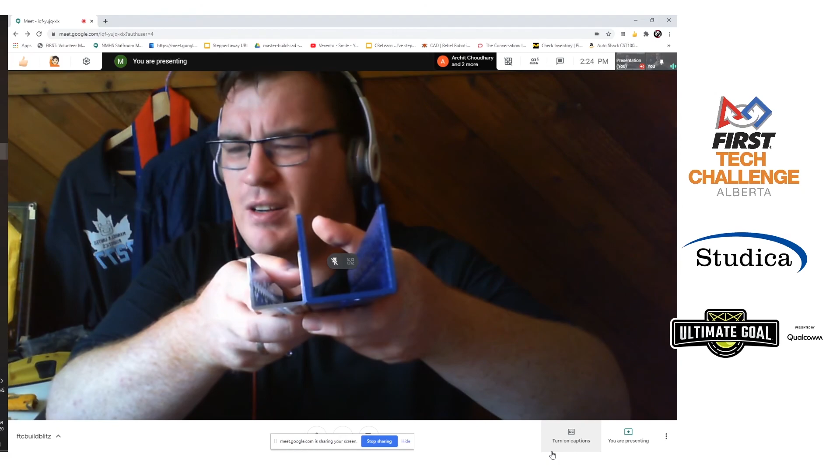It has some oval holes instead of round ones on the 45s here, but it's not quite the same size. You've got the difference between roughly 1 inch C channel and 1.5, maybe 1 and 5/8 inch C channel. The Tetrix tends to use imperial measurement bolts, usually number 632s, and the Studica one uses 3mm metric. So if you have both kits, keep your bolts separate, because 3mm bolts don't like 632s very well, and vice versa.

I actually recommend that a team pick one of them and stick with it, because they're very similar but cause all sorts of problems in the threading. That being said, I've already gone ahead and uploaded the Tetrix, but I'm going to upload some of the Studica parts here, because they're also what we're going to be using for this build.

For the basic bot, predominantly we're going to use Tetrix parts, because many of our rookie teams have those basic parts. Whereas some of our other teams might be looking for these Studica kits and integrating some of those. In the Tetrix folder, you can see I've already got all of the parts listed and uploaded here, and that's a good thing. I'll show you how to do that now.

If we go back to Build Blitz, go to our part files, and go to Studica, this folder is empty, but we do have the ability to upload parts. Obviously I've got that library of files - you can see I've got the Tetrix ones open, but I'm going to go back to the Studica parts and very quickly grab a few parts I might need to get started. I'm going to set up the rest of this folder.

As you can see, I have all of their parts, and these are the ones we'll be using from the kit. So I'm just going to grab some C channel right now, get started, and upload this stuff. Obviously I will upload the rest of this when we go there.

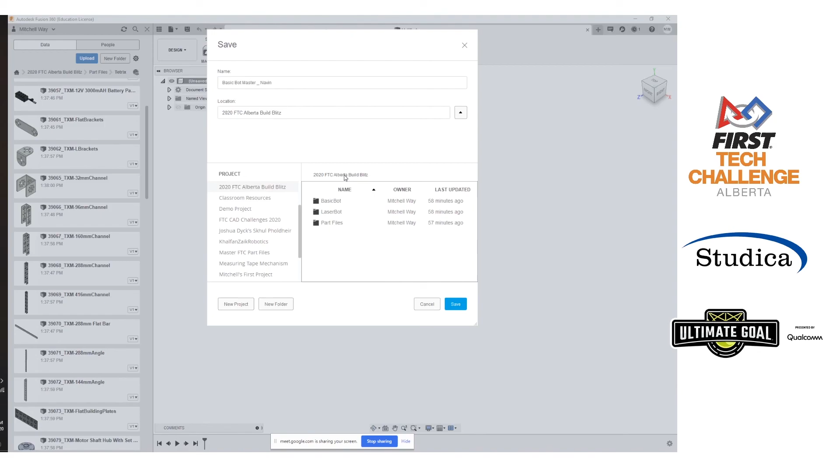That's not what I want. So I'm going to go back here, and I'm going to go to my 2020 FTC Alberta Build Blitz, and I'm just going to go back a couple of files and go into my basic bot folder that I'd created before. That way this robot gets saved into the right spot. So I'm going to go ahead and save this.

You'll notice that the name now changes to Basic Bot Master, and it's version 1 right now. We'll talk about what that means in a minute. But if I go to the basic bot, you can see that it's right here. I have it open, and I'm just going to show you how this works within Fusion 360 to actually bring part files in.

Now I can go, and if the first part I'm going to work with is this 416mm channel, I can click and drag it over here. And it's going to show itself up in the master file. Now, this file is what we would call a reference file. It's actually referencing the channel here in the part file. And that's the key thing here.

That means if I change the reference file in the part file, it's going to change whatever happens in the main robot. Probably won't be an issue with what we're doing because we're building the basic bot and we're just going to put a couple of wheels on this for now. So I'm just going to press OK.

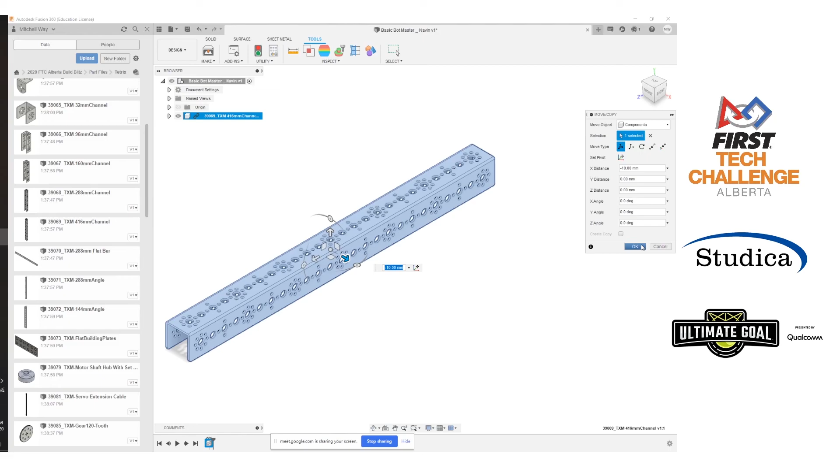I can place it anywhere in my drawing. If it's the first thing that I'm actually putting in the drawing, it's not really important where it sits, though some people will tell you that they really like putting it at the origin at 0,0,0. So there we go. We've got our first beam there.

Life is good. But we realize we want to have a wheel assembly here. So you'll notice that once I have this part here and I go ahead and save, I can click the save icon here. If I go back to my basic bot, you'll notice that this updated to show the newest save here. And it is version 2. It's the second time I've saved it. It'll keep counting versions, and Fusion will let you go back to previous revisions if you want to.

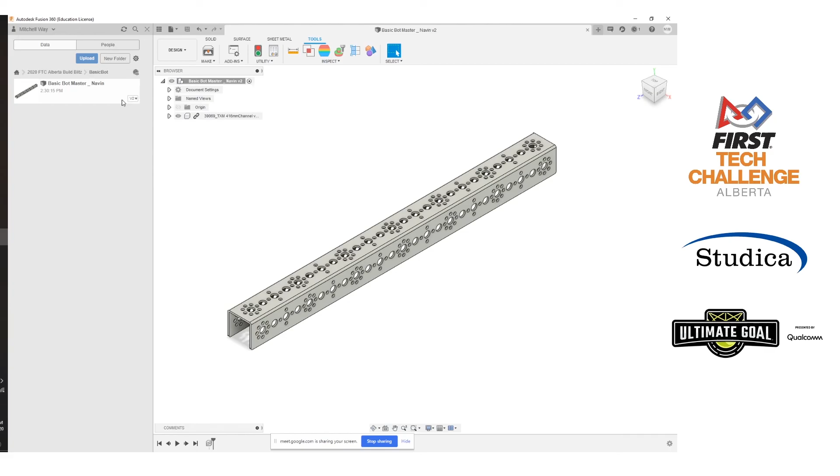I'm actually going to create a new file here. New design. And I'm going to save it, in the basic bot folder, as wheel, hub, and axle. And I'm going to be even more specific. I'm actually going to put it as an Omni. I should spell that right, Omni Wheel, Hub, and Axle.

And the reason I'm doing that is because if we look at the basic bot here, you'll see that the basic version of this is a C channel with a wheel, actually a few different kinds of wheels here. So I'm just going to scroll down until I get to the Omni Wheel, and I'm going to realize that in the Omni Wheel setup right here, the Omni Wheel is actually a few different parts.

Okay, I've got an axle here, and I'm just going to assemble, I'm not going to assemble all the spacers for the sake of time here, but basically we've got our axle, where are we here? Bronze bushing, locking nut, I think I missed by one here. Okay.

Oh, it's telling me how to assemble the Omni wheels completely here. Alright, let's go ahead and get ourselves the axle collar, and all the numbers are on here as well as the Omni wheel and the spacer. So let's do that. This is my hub and axle.

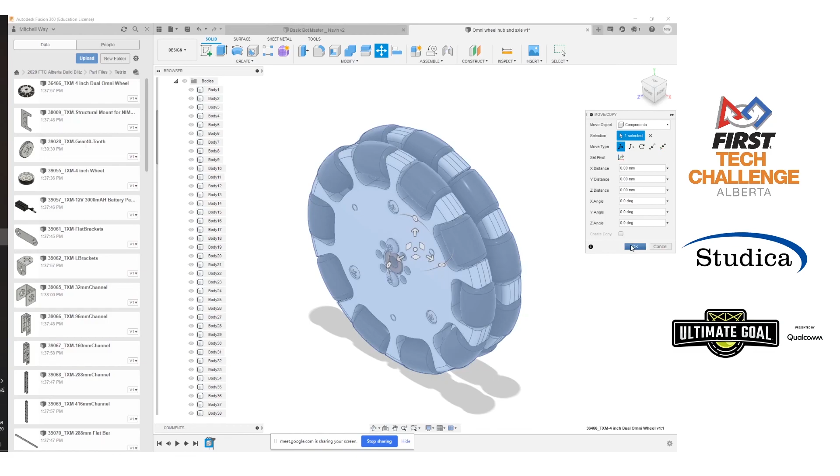I go back to my part files, and I go to Tetrix, and I grab my Omni wheel. This is a rather big file, it's rather complex, it's the entire assembly. When I drag it in here, you'll notice that I get the actual file in the file folder. If I open it up, I can actually see the bodies that go into it. I can see that it's made up of a whole bunch of different smaller CAD files, and I can actually identify them. Every individual bolt, everything that goes into this, is right here.

So for some reason, my design calls for me to have an Omni wheel but to remove half the rollers. I don't know why you'd want to do that, but you can actually make them go away right here in this breakdown, or this drop-down menu. That being said, I've got my wheel, and I'm going to go ahead and assemble it onto an axle.

So I'm just going to grab my axle here. Let's grab, which axle do I want? Probably my steel axle, let's just leave it 100 millimeters. Do I have any short ones here? I do not. Oh, there we go, there's the 6 millimeter axle I was looking for. Anyways, once I click and drag, you'll see that I now get another part here in Fusion.

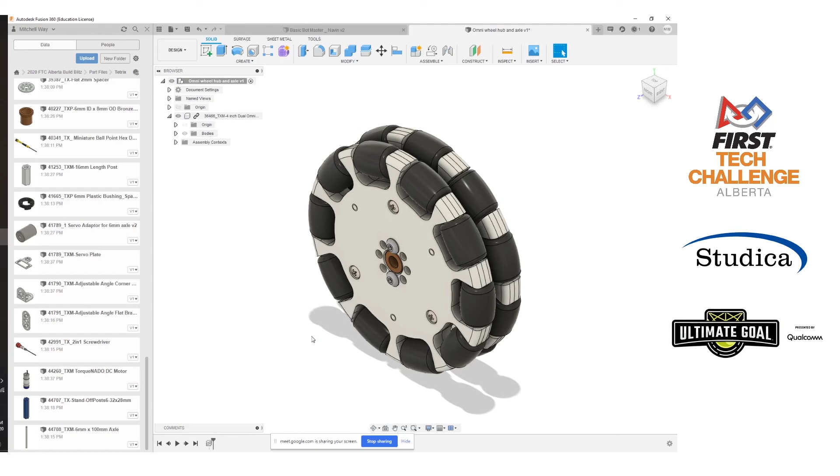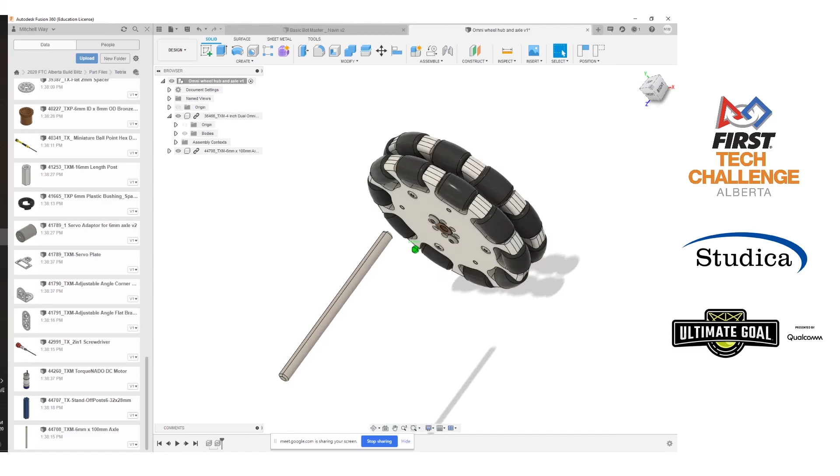I can now do something with it, I can move it around. I want it to be in a place where it's easy enough for me to work with. Now, right now I've got 2 parts, and if I click them, I can just move them around wherever I want on my screen. This is your view cube up here for any who are new to CAD. By clicking this cube in the top right, it lets you rotate around and see all the things going on in this space.

Just give me a moment here. Emma, can you go play with that upstairs, please? Thank you.

That being said, I can move these all around, but I want to constrain them together. I want to make it so that they're actually tied to each other, not just to wherever I'm clicking. So the first thing I'm going to do is ground one of these items. I'm going to ground the Omni Wheel so that it can't move, and just leave it here so I can move stuff around it. I right-click on it in the browser, in the tab here, and I click ground. And I will capture position.

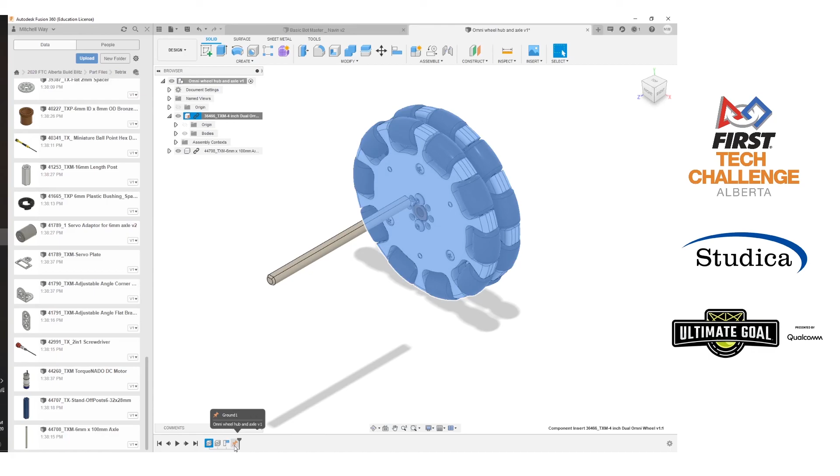When I capture the position, what happens at the bottom here is I get a timeline. The timeline is going to show me everything I've done to this drawing. If I'm creating something, I can see each individual step. You can see right here, this little pin means that I've grounded the part at this point in the timeline in my process, I can't move it now. Click and drag, doesn't move. Axle, it still moves, no problems there at all.

Now let's walk our way through a couple things here. This wheel doesn't actually need a hub on it, it's meant to be an idler, it's meant to just go. So I think what we're going to do is probably just try to put a couple shaft collars and maybe even a couple of spacers on this to actually make it functional here.

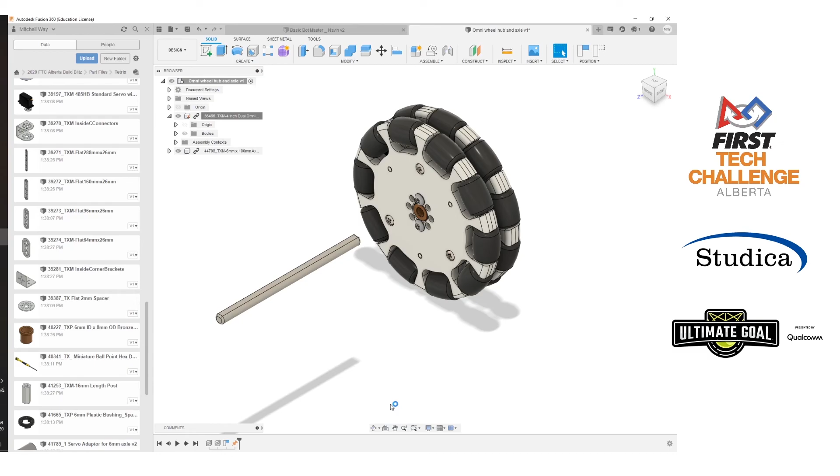So let's do that, let's go with a couple bronze bushings. Yeah, why don't we do that? Okay, I'm going to drag a couple bronze bushings into here, and this is going to allow you to actually build your axle as it was.

Now, you'll notice that I have this part. I know that this part to work is probably going to need 2 shaft collars and 2 bronze bushings, just because of what's in the actual guide for the basic bot. It might also need a couple of nylon spacers, but I won't add those right now. I'm actually going to take and grab this part and copy and paste, Control-C, Control-V, to put another one of these into place right about there. That's going to allow me to actually have the parts I need to work with out here in my build space. So let's put the axle on.

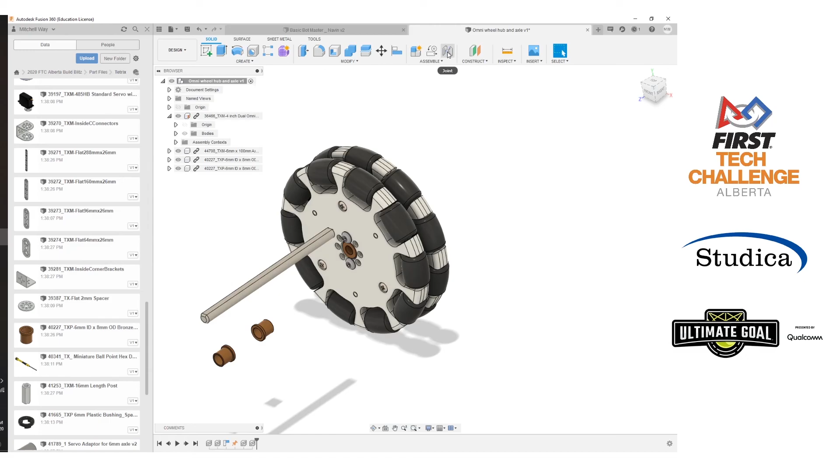The axle gets put on using the joint function up here in the top right. You have a bunch of options for joints - rigid joints, revolute joints, slider joints, all sorts of things. For this part, we could put a revolute joint on, or we could put a rigid joint on. I'm going to use a rigid joint.

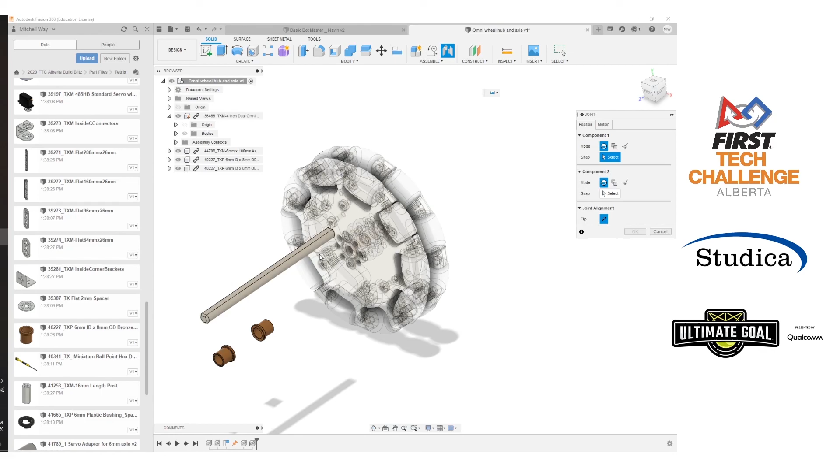What it asks us to do now is select the position of our first component. I could tie any piece of this together with the wheel I wanted to, but I want to make sure they have matching axis of rotations. So I'm going to click the round end of the axle, and then click the round end inside the wheel. You'll see it try to join those things together.

In this case, I probably could do a revolute joint if I wanted to. That's not going to work as well, though, for what we're about to do, and you just have to play with this to figure out what joints you want to use at any given time. I'll show you why in a second.

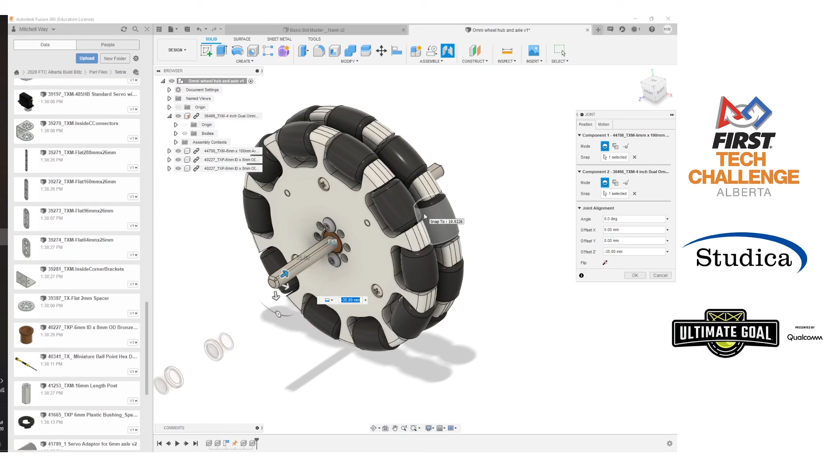Now what I've got here is I'm going to line this up about 35 millimeters halfway across the wheel, so it's approximately centered. Your wheel may not end up that way. From here, we're quickly going to join the other pieces so we can go back to showing everyone how this works as an assembly. Then you guys can get to work.

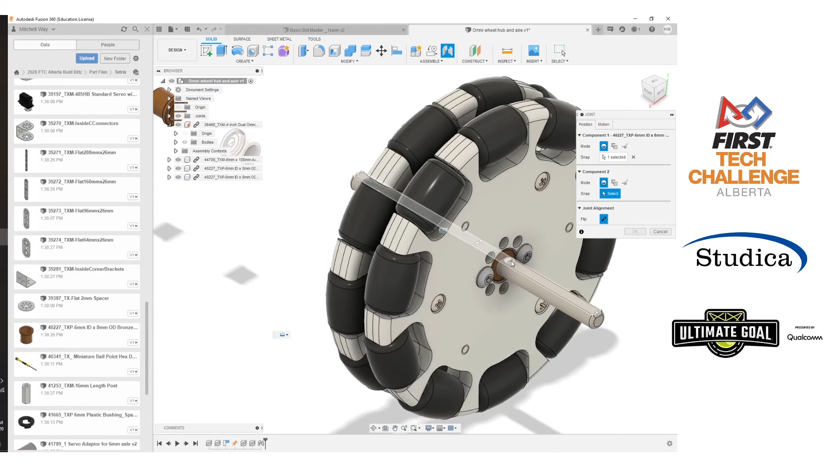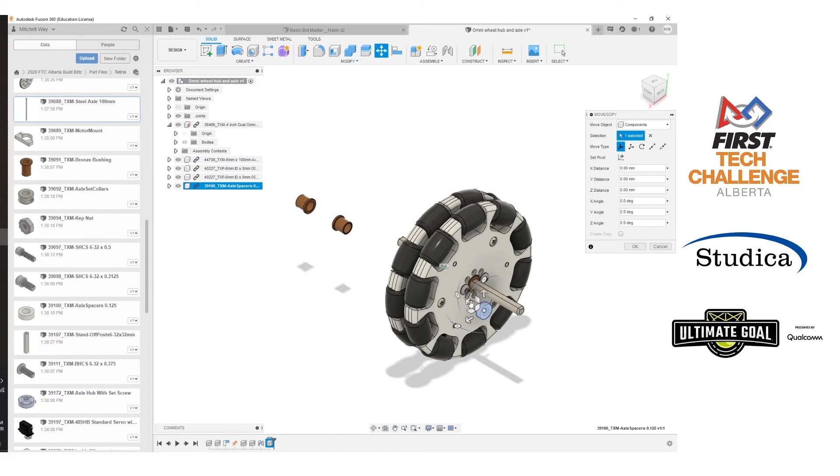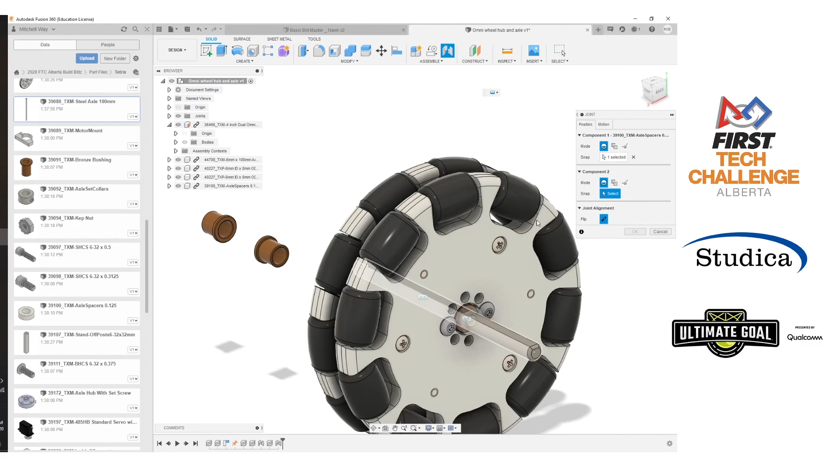Any other fun FTC stories while I'm sitting here CADing, and you guys can regale the audience with? Our battery flew out that one time. Navin, by the way, for anyone who doesn't know, who's a rookie team - Navin is also one of our MCs for the FTC season, so he usually provides comic relief during the events. It's a lot of fun for that. Now people have expectations. Expectations are a good thing. No, they're not. See, with a lack of expectations, I could do something and people will be impressed. But with expectations, if I do something, now there's like a rating bar and I have to fulfill that. Otherwise, people are gonna thumbs down me.

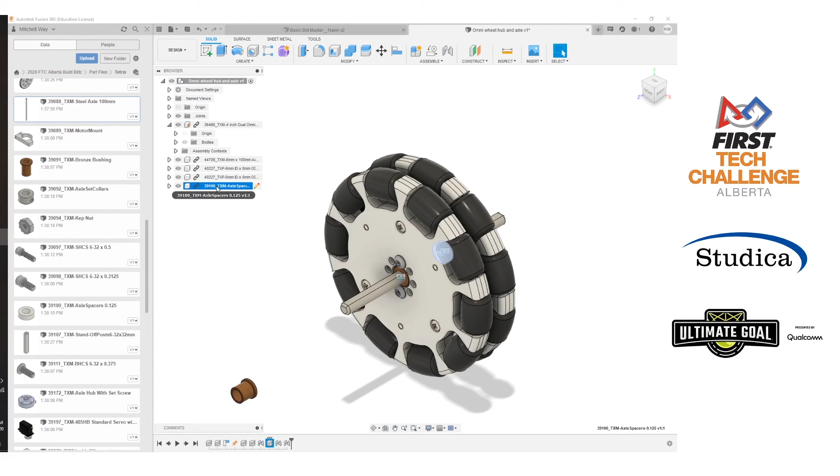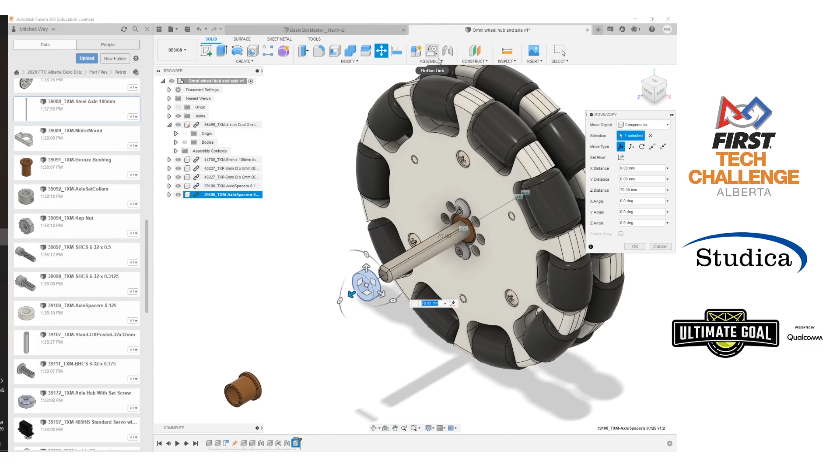While we're here, I just want to point out that the copy and paste thing does work after you've joined things. In this case, I did put an axle spacer in here, you can see it showing up in my browser. I'm going to take this and copy it using Control C and paste it using Control V, and it gives me a new copy of that part that is not constrained or joined anywhere. So I'm going to use that to put another spacer on here really quickly without digging in my part file. The part file you create on copy and paste will still be linked to the original file - that just means they'll be copies of each other.

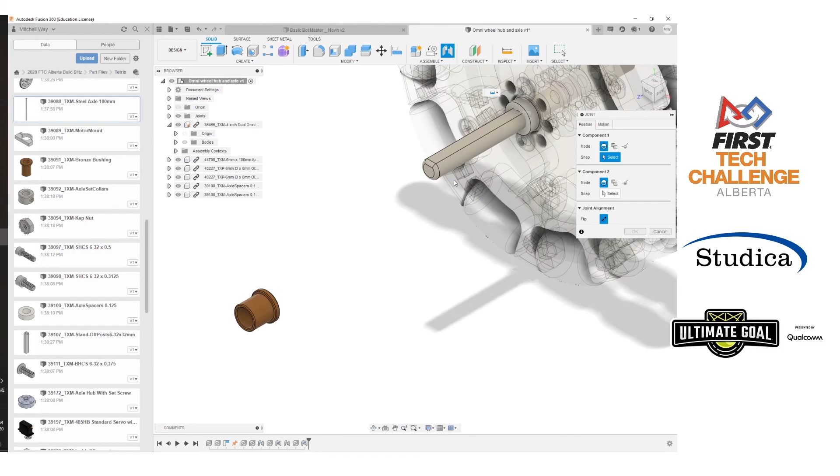I'm just going to finish this, and then I want to show you a really cool piece of this, which for teams that aren't going to be able to meet as often in person is going to be hugely, hugely important for you.

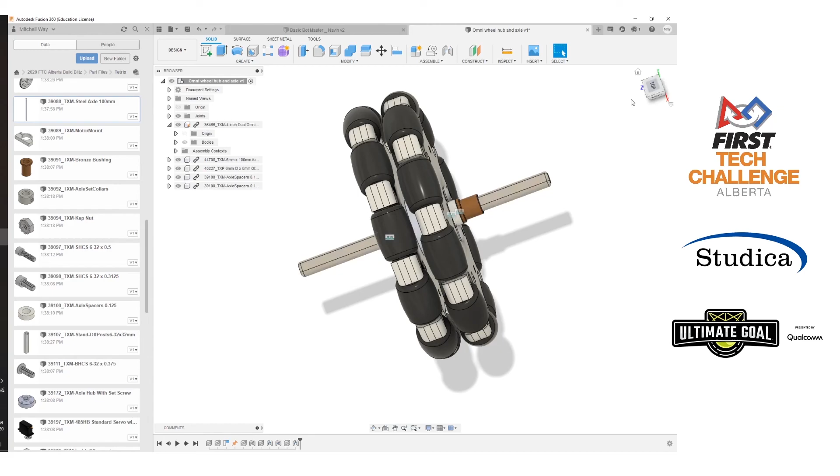Okay, so I've constrained everything together, and I just did a rigid constraint right here. So I basically just have a wheel that in reality wouldn't hold up - it wouldn't actually hold itself together, but I'll explain what I'm doing here in a second. Actually, I just realized I don't need my second bronze bushing, so I'm just going to click on it and delete it right out of the browser. Now I've got a wheel - it's kind of grounded, it's constrained, it's where it is, it's what it needs to be. I'm going to go ahead and save it.

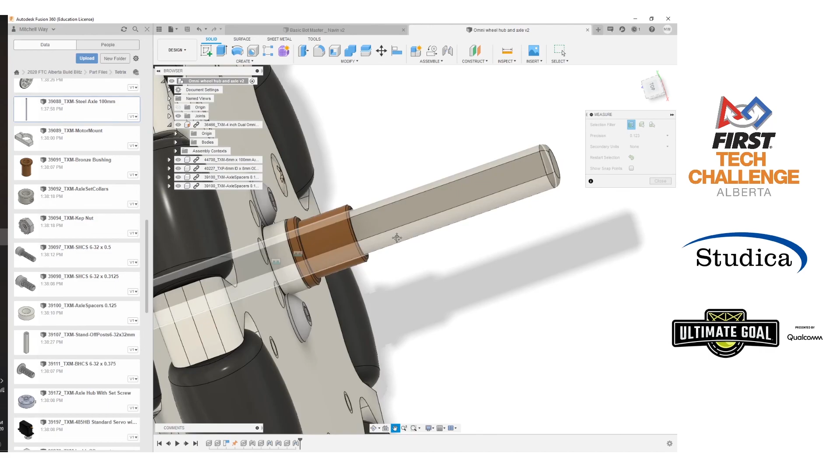I'm just going to quickly ask myself a couple things, because this is a point you might be like, well, how far away is this axle? How far is this going to hang out? You do have a button up here called Inspect, and it lets you click on 2 points. So let's say I want to know the distance between the inside of this axle and the edge of this axle - you're going to be able to get a quick measurement for that.

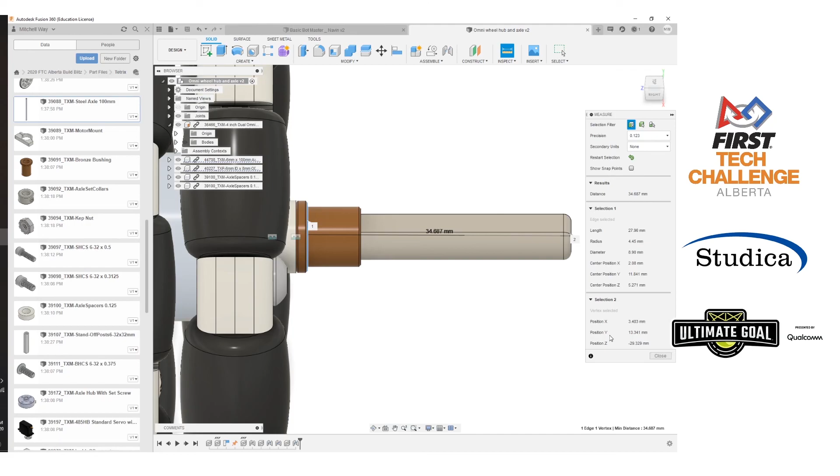Now you'll notice that when it brings up the full menu here, you can actually see the distance in X, Y, and Z, because right now I've got an angle on this. I've actually measured from one point to another, but I really want to know just how far it is in this aspect. I can see that it says 34.687 millimeters, but it's actually 29.3 millimeters in just the straight linear direction.

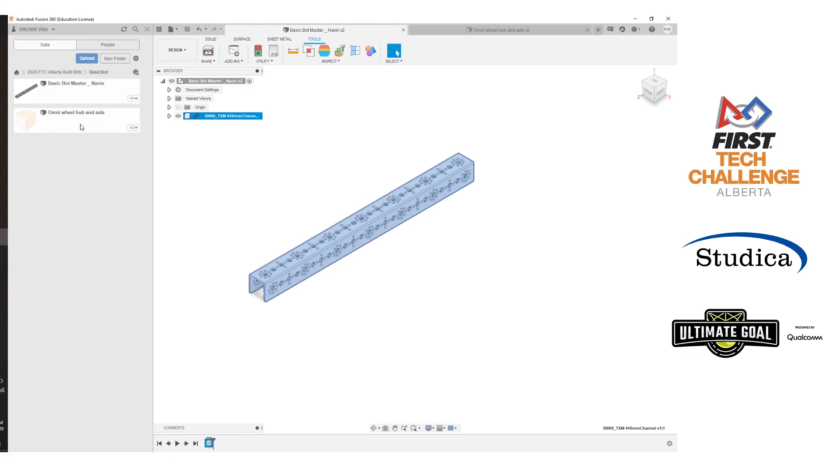Anyways, that might be useful for some teams when you're doing some measuring here and there, and I'll show you why. Because if I go back to my basic bot master here, I now don't need to bring individual parts into this file. I can actually bring in entire assemblies. So if I want to bring in the wheel hub with the axle, I can bring it right into this drawing, and I can start attaching it to things.

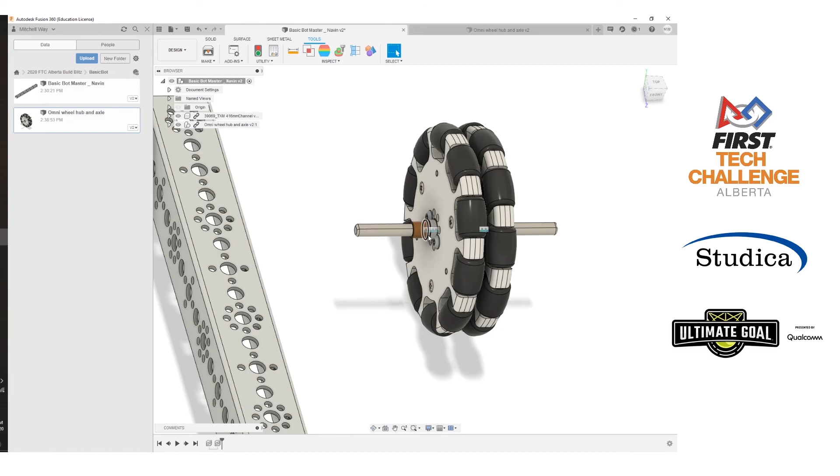Now, let's start playing with this, because now we're playing with things in virtual space, which is amazing. I'm going to turn this 90 degrees, and I'm going to try to attach it to this C channel here. Now, I've got my axle here, and if we look at the basic bot and how it's attached, we've got the Omni Wheel on the end of an axle with a nylon spacer and a shaft collar, another bronze bushing spacer, shaft collar, and we're going to try to do something similar to this. But you'll notice that I've got a bit of a problem. My axle doesn't quite fit right now.

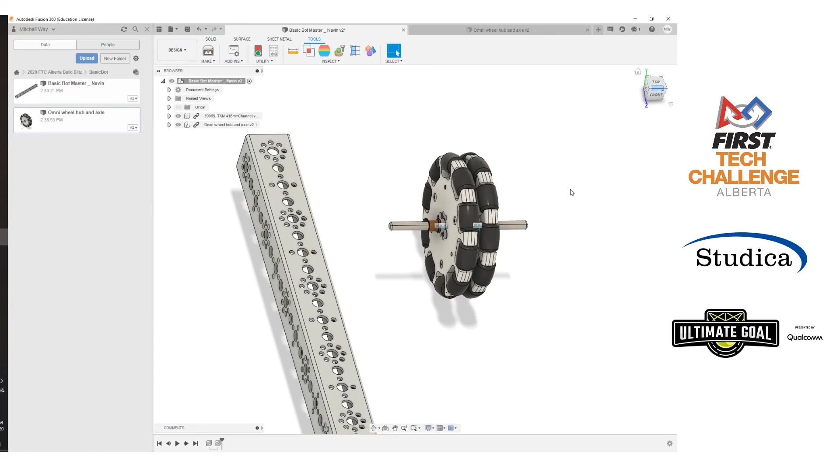So here's what we're going to do. We're going to take the bronze bushing, and we're going to join it to the C channel using a Revolute Joint. Now, a Revolute Joint is going to allow it to spin.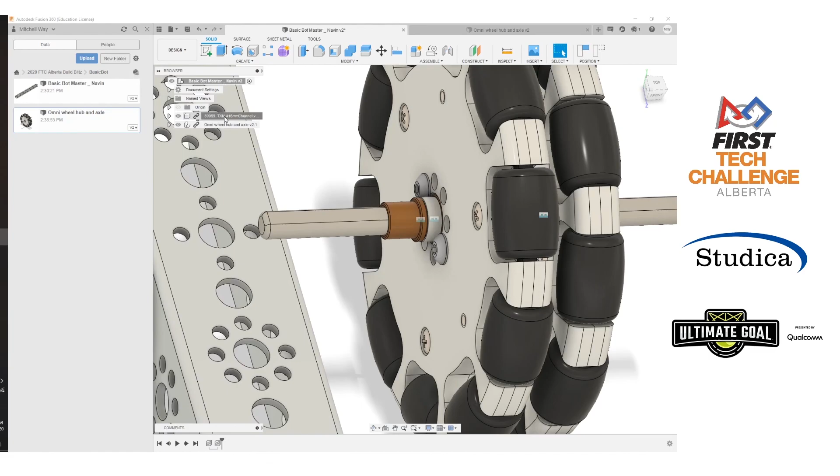Watch this. Before I do this, I'm actually going to go ground my channel. Now, remember we talked about grounding. It means you can't move it in space. Right now it can move. I don't want it to move. Right-click, ground, life is good. I'll capture position. Again, you can see at the bottom in the timeline, I'm kind of getting a picture of what I've done here.

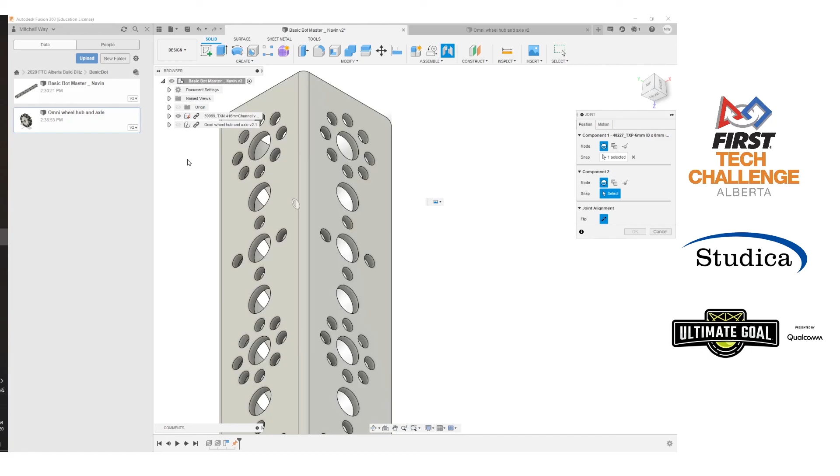I'm going to actually ground this bronze bushing. I can't see what I'm doing right here, so I'm temporarily going to make my wheel hub go away by clicking on the eye here, and I'm just going to attach it into the end here. Now you'll notice that if I add this back in, I can see that I've made the attachment for the bronze bushing. But the bronze bushing is joined to other parts in this assembly, so it's going to pull them along with it. Right now it's set to rigid.

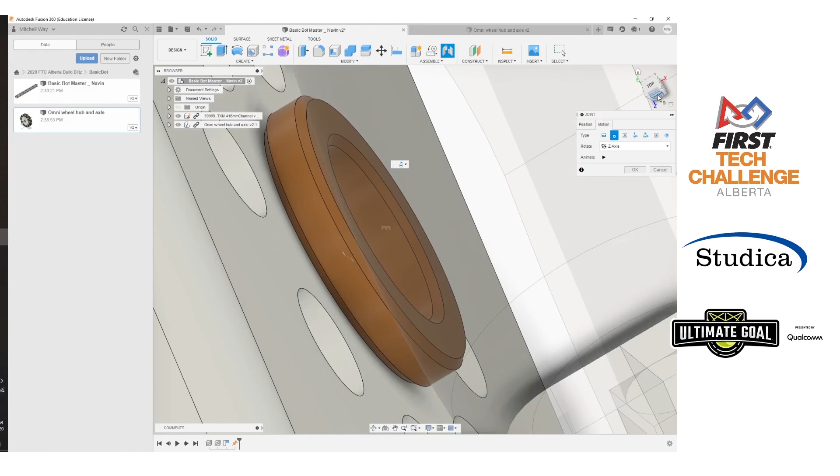I want it to be a Revolute Joint. If you notice, if I zoom in, there's a little thing actually spinning around inside there. That wasn't a great animation of it, but you can see there's a little piece spinning around in it, showing that it's actually rotating. When I press OK, it's going to resolve all of these things. It's going to bring all of the joints back into something that makes sense to Fusion, and it's going to pull the wheel with it.

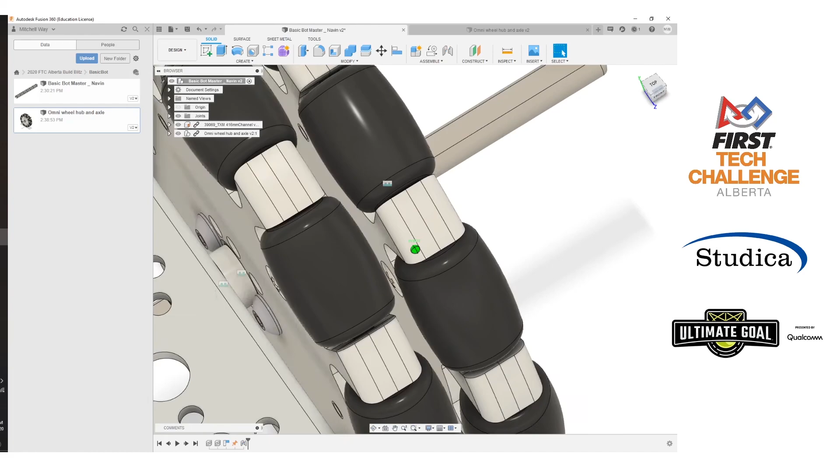Now you notice something here. This wheel, it now spins. That's awesome. That's really good for illustrating your mechanical design, especially if you deal with something like a lift, a scissor lift, moving parts, lever arms, anything like that. But I do have a problem.

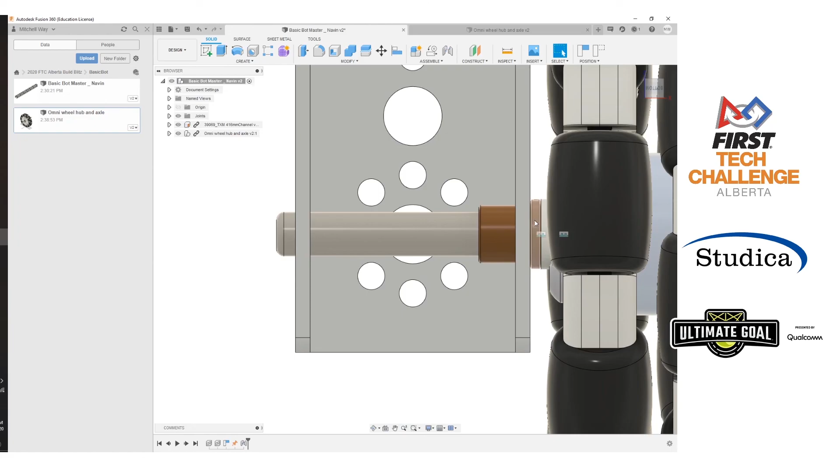On the bottom of this wheel, you'll notice that I've got a bronze bushing here. I don't have a bronze bushing on the other end, which I probably should have, and my axle hangs out way too far to this side. So this is where we get the chance to play with our designs a little bit. We're going to be able to add the rest of those things on.

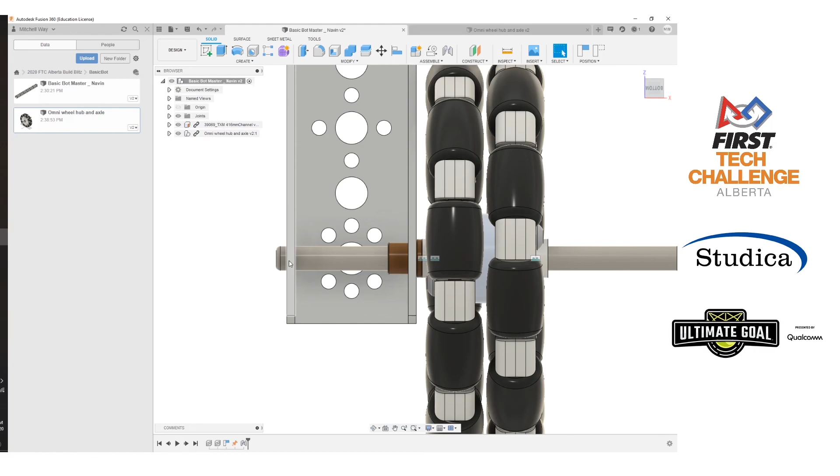I'm going to use the inspect tool, and I'm going to grab side to side, from the outside to the outside of this C-channel. I know that they're 30 millimeters wide. That's awesome, that means I know that space when I put my other bronze bushing into place. I also need to know that I need to slide this way the heck down. So let's save our design.

Yep, and then let's go back to the Omni Wheel and let's fix the problem. So I got the Omni Wheel, I know this. Okay, and let's fix the first problem. I know that I want to slide this axle way the heck out of this wheel.

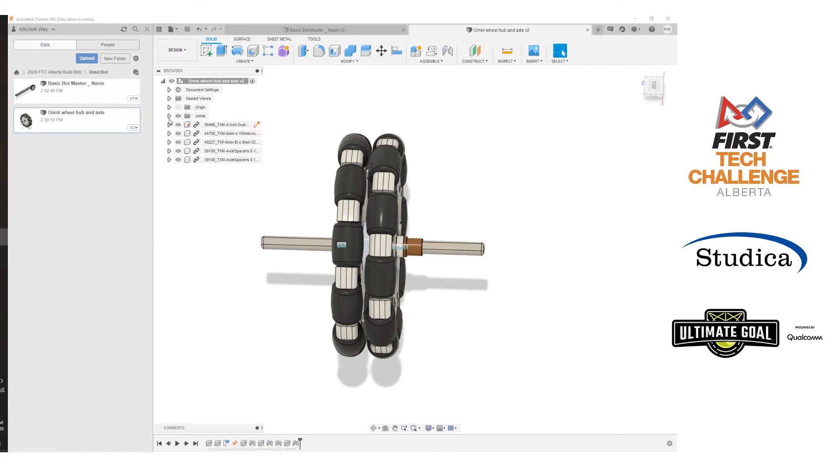So I'm going to go to my joints menu, right here, and I'll see that I've got 4 rigid joints. First rigid joint, if I edit joint on it, is going to go back to this original joint. Double click only works in Inventor, I think.

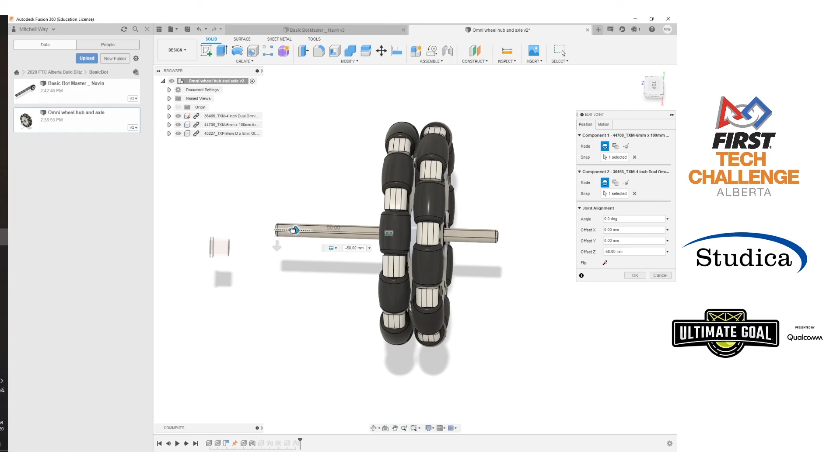Now, I know that this rigid joint was slid 30 millimeters that way and attached to this bronze bushing. It goes back to exactly when I made it. I'm just going to slide it a little further down and see what happens. When I press OK, you'll notice I've now moved this axle a little further down, and I can measure exactly what I need if I need to. But right here, I'm kind of eyeballing this at this point. That's okay.

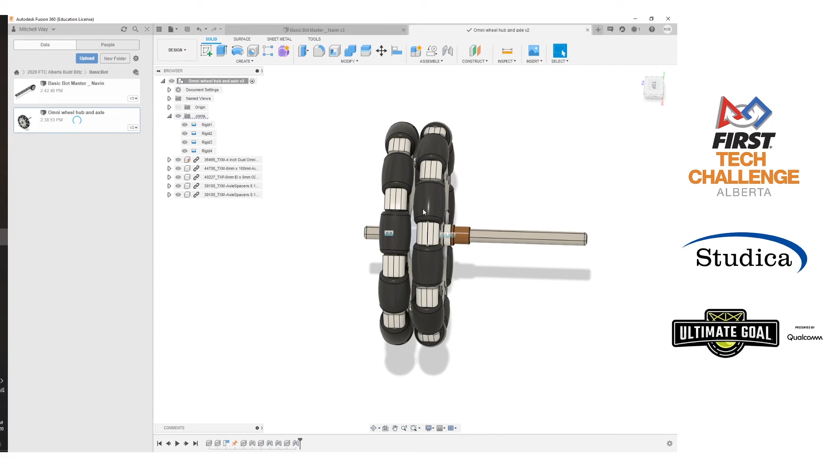Now watch this. When I press save, I've now changed this drawing. But this drawing is referenced in this other drawing, and you'll notice what happened—I'm getting these big yellow yield signs, these hazard signs saying, hey, you don't want to do that.

I did actually. What we're going to do now is go up to this link button here that says Get All Latest. This is going to update my design. When I click it, you're going to see it pull the most recent version of that drawing into this drawing. So I moved that wheel assembly back into place here.

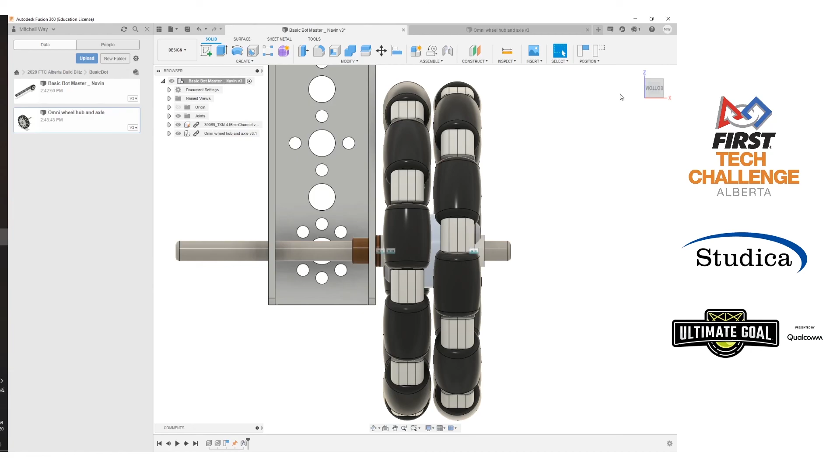And you can see now I've got my axle, exactly where I want it to be. Okay, I probably have enough space to put the shaft collars as well as the 30 millimeter spacer bronze bushing on here. I'm going to finish this because this is something that as a team you should absolutely practice, you should go through in terms of building some CAD basics, some CAD things to work with even before kickoff happens. So I'm very quickly going to grab this bronze spacer that's here.

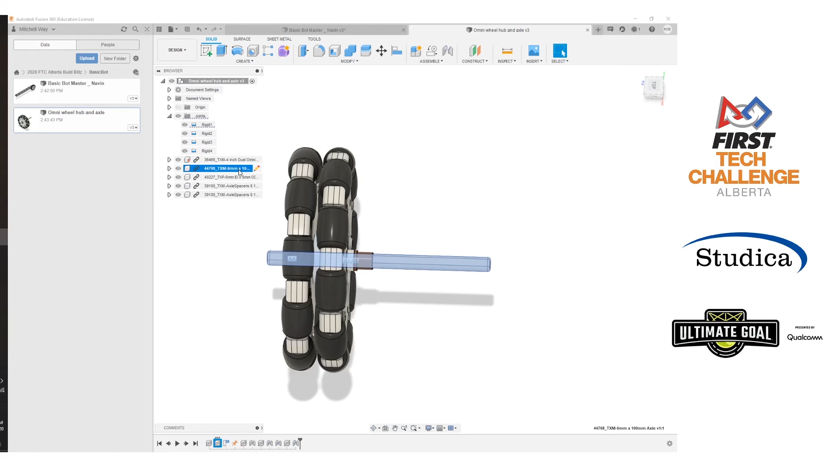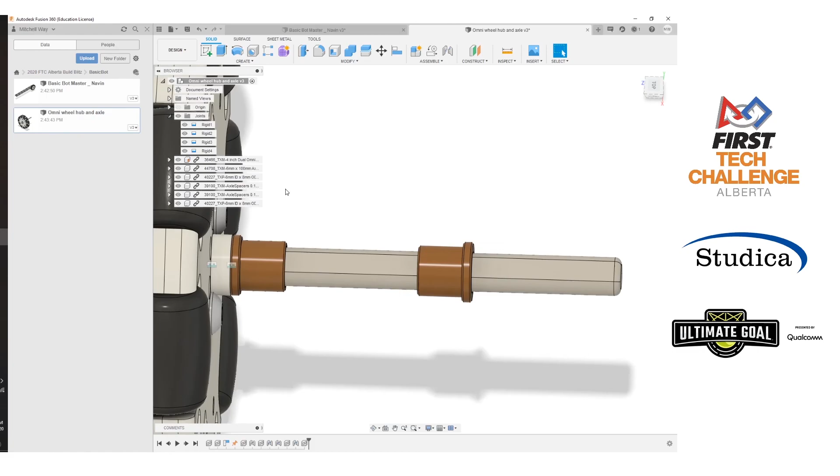I'm going to copy and paste it, slide it down exactly 30 millimeters, hoping that will work. I suspect it won't, and I'm going to rotate it around 180 degrees. Now if I do my inspection right here, and grab this here and this here, I'll find out that it is 35 millimeters. Spinning it around 180 degrees meant things didn't quite work. So in this case, it looks a little skewed to me.

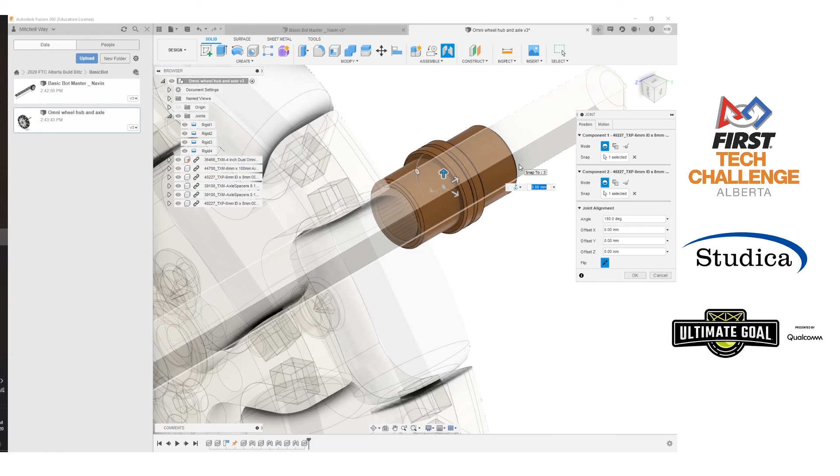There we go. Okay, I'm going to go to joint, and join these two things together, but with an actual gap between them. You'll notice that when I join those two things together, it's going to line up and kind of mesh those two sides up. I just realized it was trying to do a Revolute joint. All of my joints on this have been rigid, so I'm going to keep them rigid, because really this is just meant as a reference drawing.

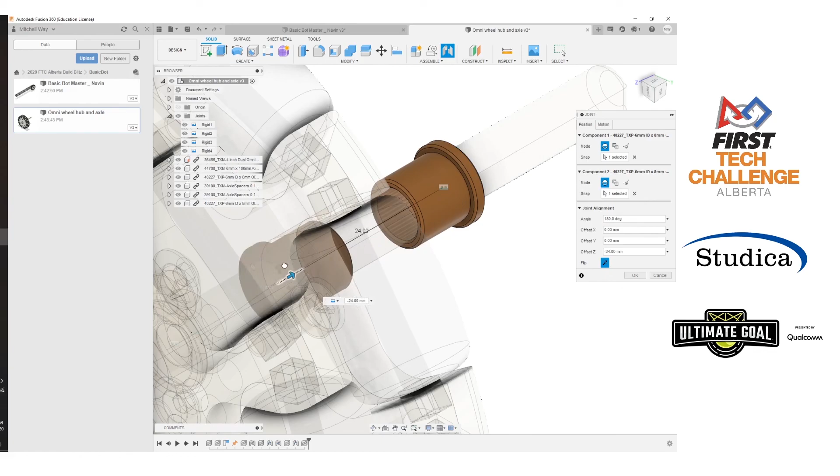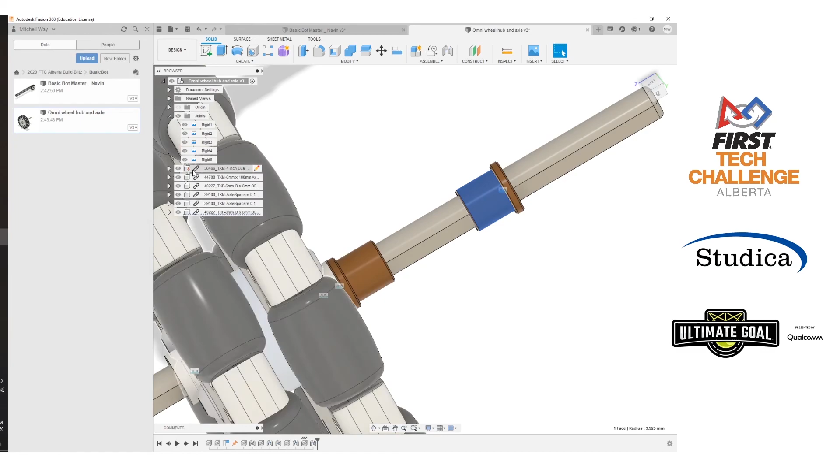That being said, I'm going to change my position, and offset in the Z direction so that I have that gap. I know that gap has to be exactly 30 millimeters because I measured it earlier. So I'm going to go ahead and space those out exactly 30 millimeters from each other, and press OK. Now, what happened is this bushing here, the new one I added, got pulled into place 30 millimeters from this one, and this one didn't move because it's joined to something that's grounded. We can see that this is grounded, the little pin here in the big Omni Wheel. Now, those are exactly 30 millimeters apart.

Because I'm a perfectionist here, I'm going to go to the part files, and very quickly drop 2 shaft collars in this, because it's a good idea to actually finish these if you have the ability to. I'm just going to go find, that is the axle hub with set screw. I believe that's the one. No, axle set... shaft collars. There we go. Got the whole word right.

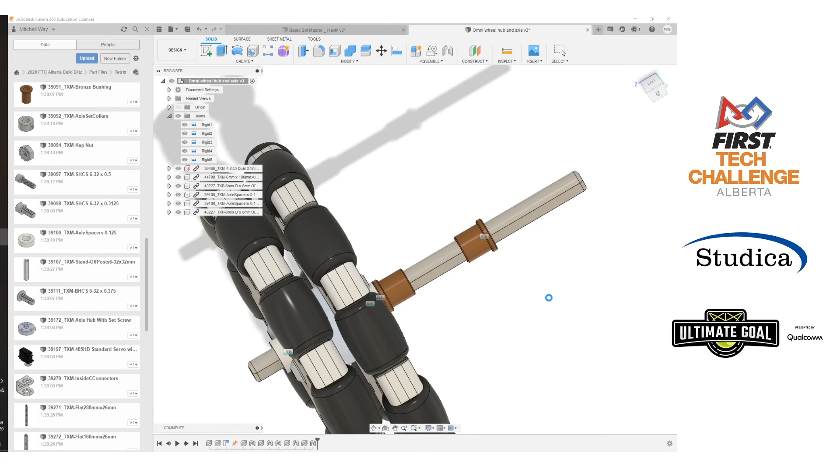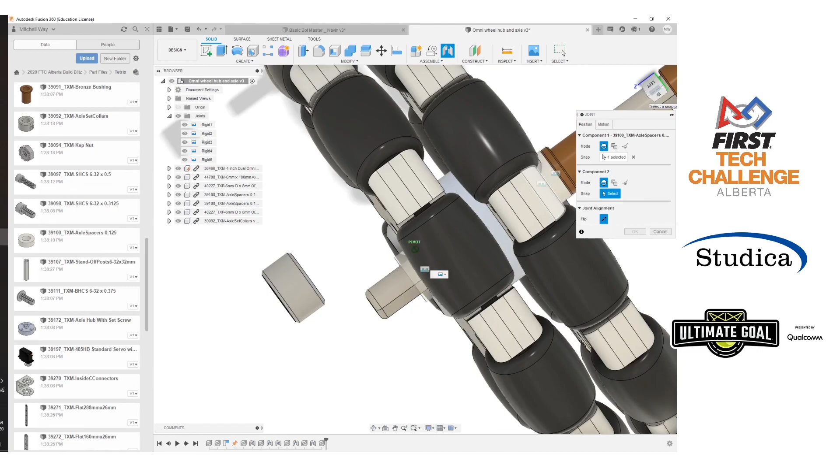I think Navin's probably having flashbacks on this one. This particular part here was one that in Rover Ruckus we used quite heavily up in Northeast Calgary, and these things didn't exactly like the edge of the crater too much. They were a little bit funky. Right, Navin? Navin? Funky's an understatement. Probably the lightest way to put it. Nick, you have any good stories about the basic bots for FTC?

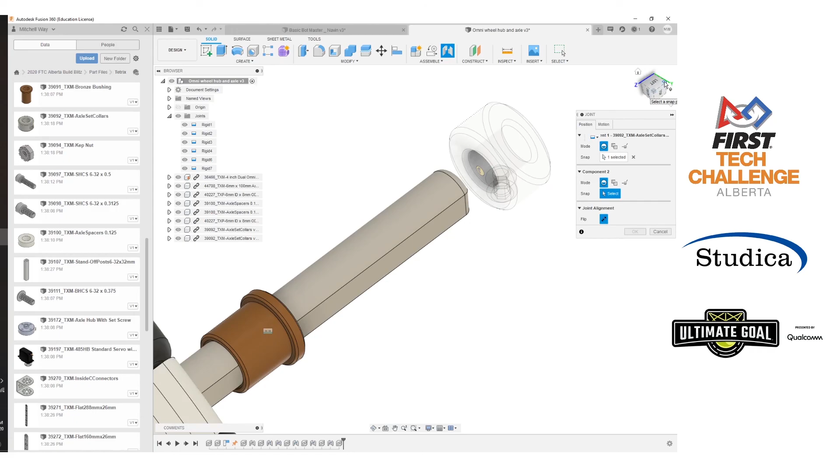Not many issues, just a lot of times students don't remember how tight some parts have to be, so a shaft collar falling off or a wheel falling off in the field. Nothing sucks more than parts falling off, or your robot falling apart on the field.

Navin can also attest to that. The 7277 robot had its battery bounce out of it in the middle of a match in Houston at the Worlds one year.

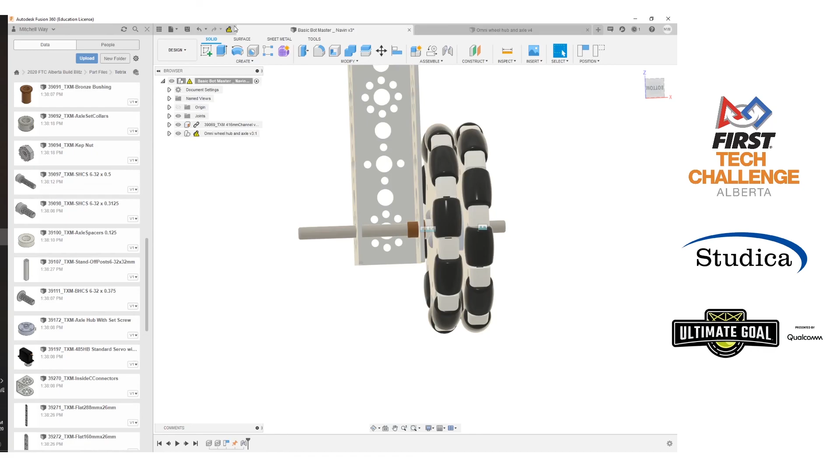That was very unfortunate. Anyway, where I'm at with the CAD file right now, I'm just going to save this, because now this build actually matches what the basic bot guide says for an actual assembly for the front. I've saved it, and I'm going to go back to my master here and click this button again to get the latest drawing, and you're going to see it pull into place all the other parts.

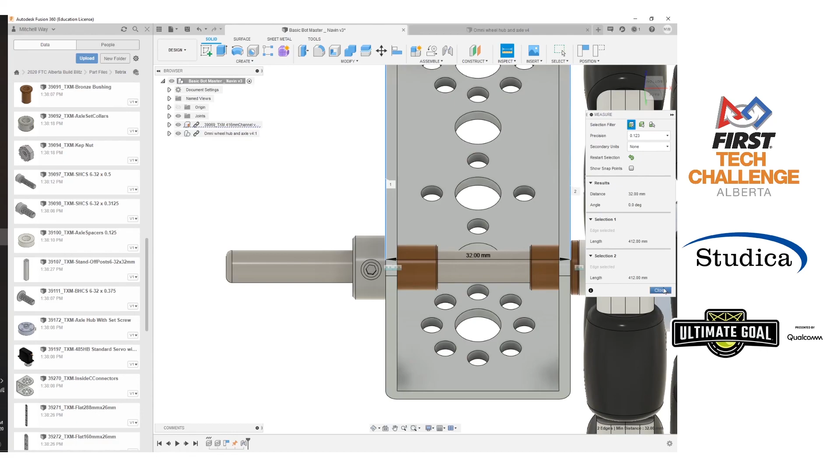Just looking at this right now, I'm seeing there's a little bit of an error. I think I might have measured the inside to the inside, or the inside to the outside of this channel. I was using 30 millimeters, but let's check it again and see what we got. It's actually 32 millimeters, so I realize I made an error. Let's show you how to fix it, because this is something that'll bother me otherwise.

We go back to our Omni Wheel. We know it was 32. We go back to the joint that we used to create that gap, and I believe it was rigid 6. You can name these, by the way, so if you want to name it like 'gap between shaft collars or bushings,' you can.

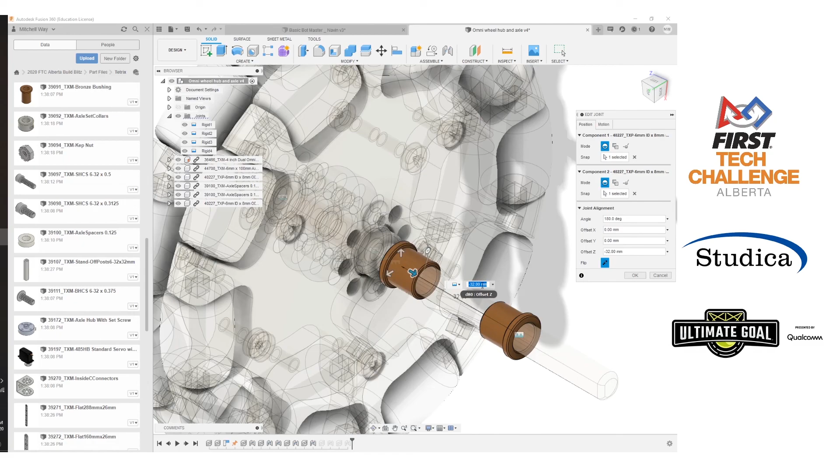I'm going to space this out to 32 millimeters, just like the measurement said, and press OK. Notice that it spaced everything out because I joined everything to the next piece in the chain of this drawing, and I press save. Then when I go back here and grab the latest drawing, you should see this piece pop out, and that's exactly how you're supposed to set this up.

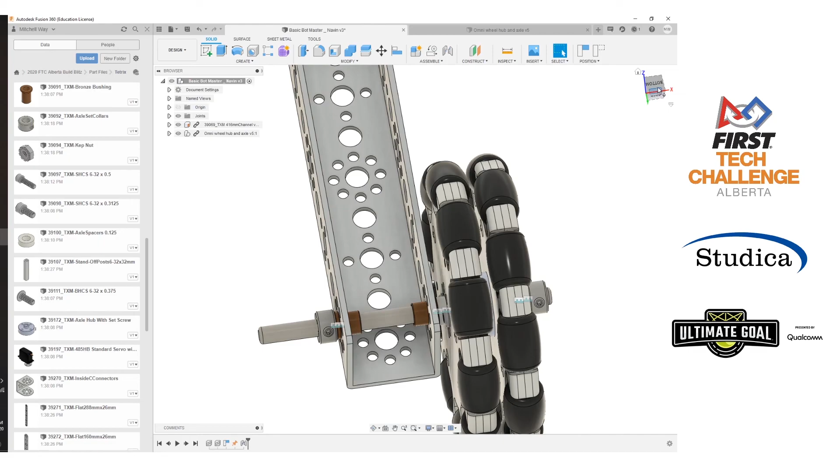Now that's kind of the basics of Fusion 360, and the basics of the first step of this COVID team method, where people can come in and actually do multiple designs.

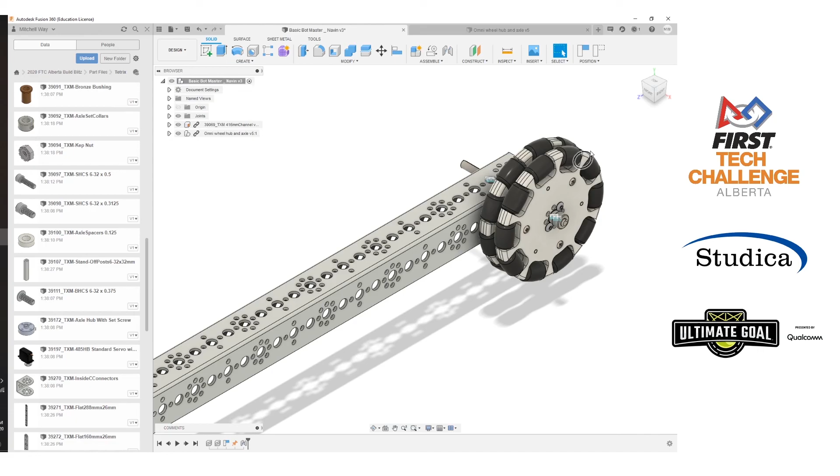The reason we call this the Design Blitz is what's going to happen now: I'm going to send Navin and Nick, and potentially even Archit, out to try to assemble the basic bot and build some basic chassis designs here.

Now guys, feel free — we're going to publish all these, so if there's anything in that basic bot guide that you want to change up, move around, or make your own, absolutely do it. We'll talk about that in a later video.

Meanwhile, I'm going to take Fusion and do up a couple of pieces here around what a more veteran team that might have some fabrication space could do with their design. In this case, I'm using the example of somebody who has access to a laser cutter and some plywood, or maybe some ABS, to do something a little more custom fabricated.

Next week at kickoff, we're going to set up another video where we do a build blitz on whatever mechanism we need to play the game.

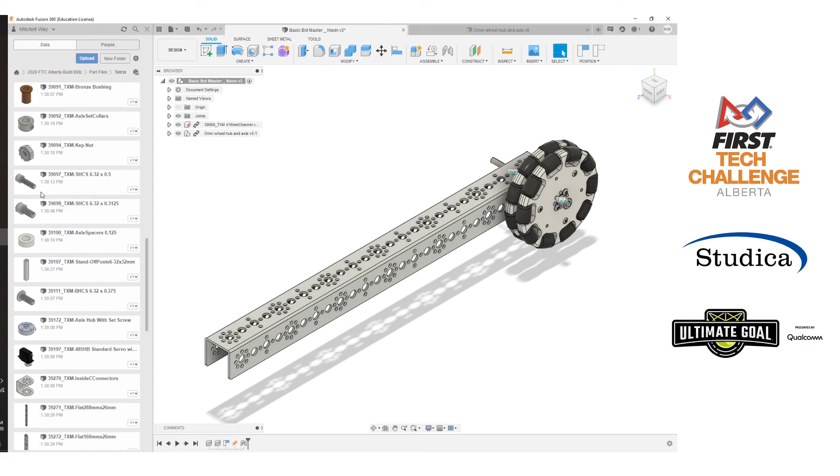In all cases, I'll come back to everyone's video in just a moment. I just want to point out that when designing a robot for a game like this year's, where we're probably going to be shooting for something, one strategy piece I'd definitely recommend, especially as a mentor, is this open-ended piece — it's a really good idea.

Because you're going to have to intake whatever the implement is, probably off the floor. Having that open end allows you to pick something up from the floor itself, bring it up into a shooter of some sort. Because, I mean, we all kind of said we think we're going to shoot something.

The game's named Ultimate Goal. It may as well be.

That being said, we'll come back for some videos on more advanced CAD techniques, and some more videos to show off what everyone's created in their CAD. Then next week, we'll build some stuff to actually play this year's FTC game, in advance of you guys doing some remote events this time around.

Any last words, Nick? Navin? Anybody want to pile in here? No, just best of luck to the teams for this upcoming season, and yeah. Fantastic, guys, we'll see you later.